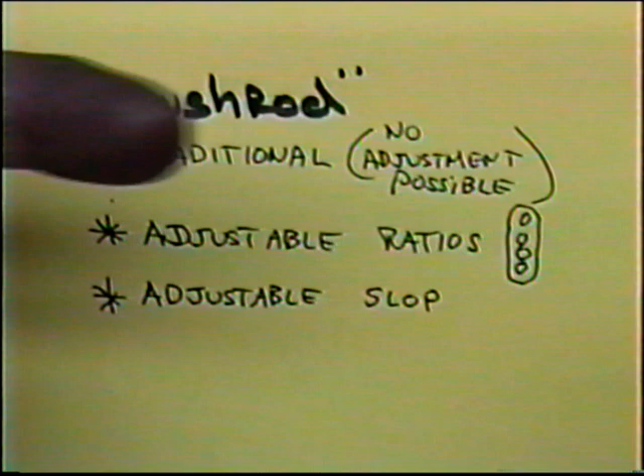It gives us that option. Now, adjustable slop would be that one of the holes between the pushrod that goes from the flap to the elevator would have an 1/8 inch hole and a 3/32 rod, and it would create some slop. Without that slop, I've found it very difficult to trim a plane to fly level. If a plane doesn't fly level, usually putting more slop in will help up to a point.

We've also included on some of our ships an adjustable length pushrod, and that's worked well. That's worked great for fine-tuning. But again, because we have a take-apart airplane, in a matter of 30 seconds, and we did it last year at the Nats, we can just take the pushrod out.

So what you see here is, on a traditional plane, where you have to cut the fuselage apart and drill holes, well, we've kind of left this in the past. We don't do this anymore.

We have 3 possibilities here that at some point in time we want to try different ratios, and we have that ability to do that. We just take the tail off the plane, drill another hole. We have adjustable slop, and the way we put the slop in the plane, I'm going to detail that out right now.

And we have an adjustable length on the pushrod. Now this is the little gizmo that Bill Biles sells, which is an excellent little thing. If you have one of those, that's a great way to do it, but there's even another way, is make an adjustable pushrod with a solder slip joint, and once you find where the plane flies in dead neutral, just make another pushrod without the joint.

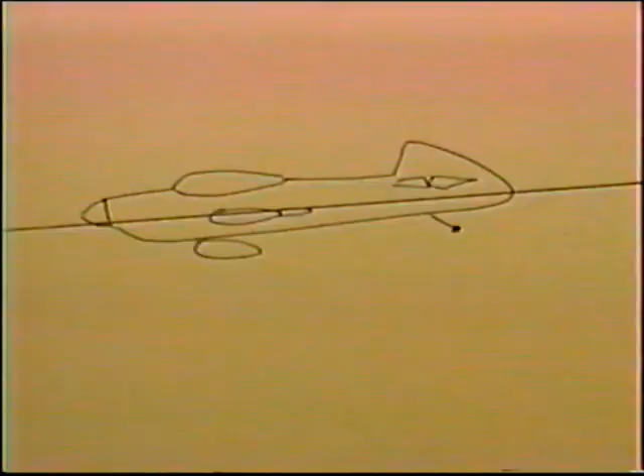Some thoughts that I've had, things that I've found over the years that seem to be very, very significant. Number one, if everything is lined up, if the wing, the motor, the wing, and the tail are all in absolutely perfect alignment, you probably don't need a lot of slop in a plane. Maybe you don't need any. I'm not sure. This is an aerodynamic thing that has many sides, and I can only give you my opinion. My opinion is that all planes should have some slop.

So what I have is on my flap horn, the hole that's going to go to the elevators, this hole is an 1/8 inch, and it has a 3/32 rod, and that just allows a little bit of slop. But now you have to line everything up in neutral. When my flaps are in neutral, I want to be sure the elevators are in neutral. Well, how do I do that if I have a slop?

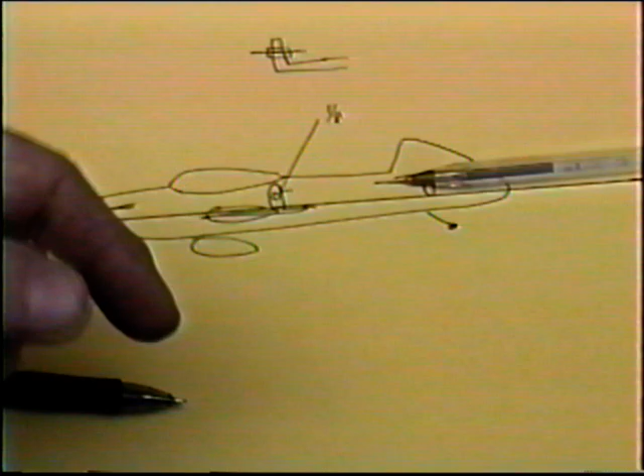Well, what I do is I take the pushrod end and put a little piece of fuel tank tubing over the end, and that lines up in my horn. Then I line everything up, and then I take that little piece of tubing off the pushrod and solder it. And this gives me just a little bit of slop, and I found that amount is a real good starting place. Now, some of the reasons that you might need this.

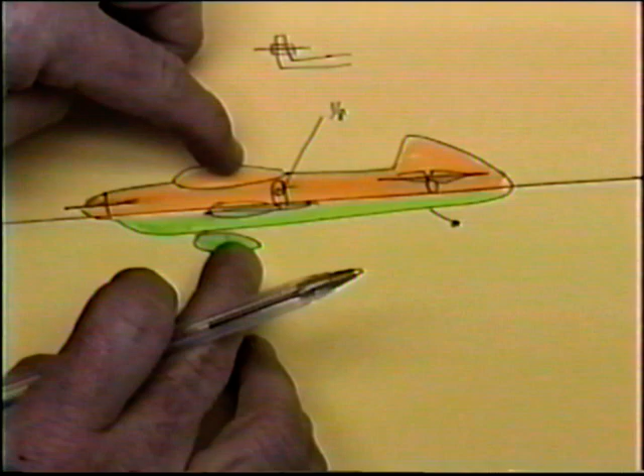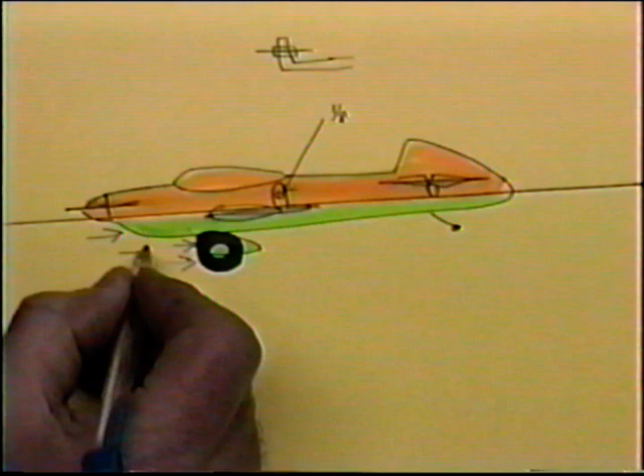Look at most planes, and you go to the center of the wing, you notice that the drag, parasitic drag, is not equal top and bottom. So let's pretend that you built this plane and you decided, well, gee whiz, for flying at my flying field, I need bigger wheels. Well, now you've made it even worse, because what happens? All of the parasitic drag is below that center line, and what it's trying to do, it's trying to constantly change the trim of the plane.

If you were to add something to the top of the plane, let's say you've redesigned a canopy for a larger canopy, now you've added more parasitic drag up here. And what happens is now the plane will not turn equally. A good example of that is most planes, when you put wheel pants on them and then take wheel pants off, you have to readjust the handle a little bit.

I found it's a very significant thing to get this drag lined up so that the plane tends to fly neutral. Now, if it doesn't fly neutral, if this parachute that this is running into, it's wanting to nose this plane down all the time it's flying.

The bigger you... pretend right here you had a little parachute. Well, that's what that little... you're trying to equalize the pressure on, and that's what a really good design, a design that evolves over many ships, and basically the Cardinal, Strega. You can figure out where and when this could be.

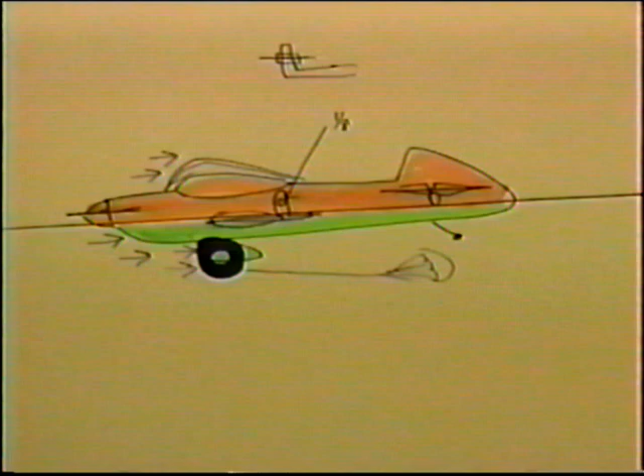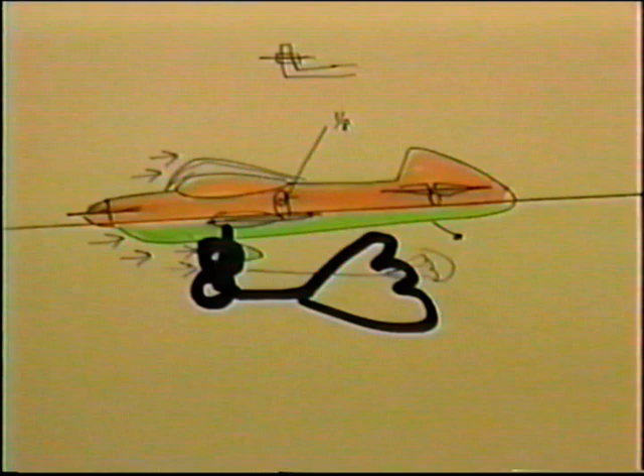Now, it changes in a lot of ways. If you, for instance, make the landing gear longer, that parachute just got twice as big. If you've decided, well, hey, my custom plane, I'm going to have this, the Willie the Whale canopy on it or something, you've just changed, and now you have to basically go back to where you've got to get it to self-center again.

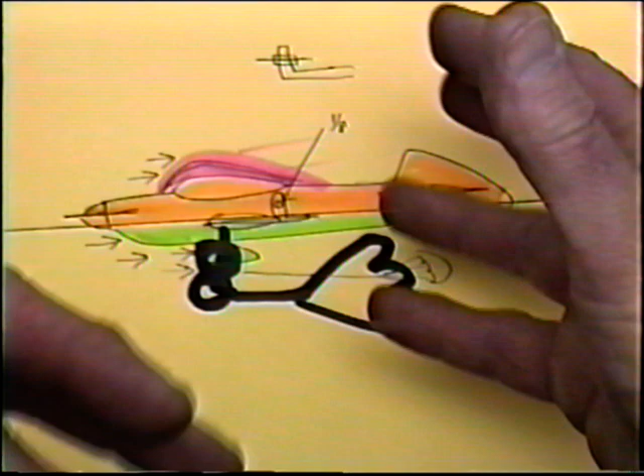Now, if this was all done ahead of time, and you were building an exact plane that had already been built many times, and you knew exactly which wheels went on it, well, it'll be fine. But we never do that. We're always building something new, and that's the fun of the hobby. So we want to be able to adjust this.

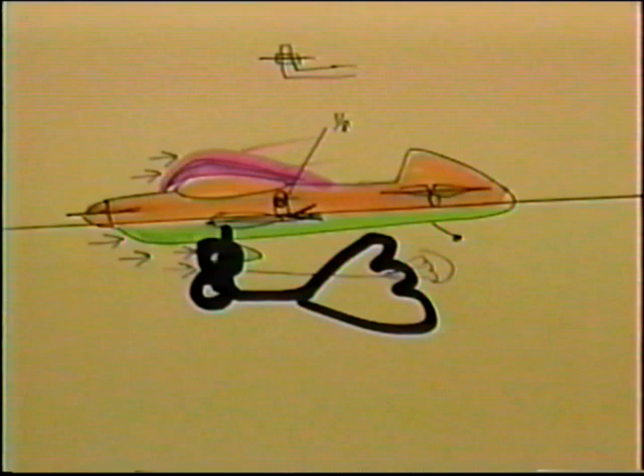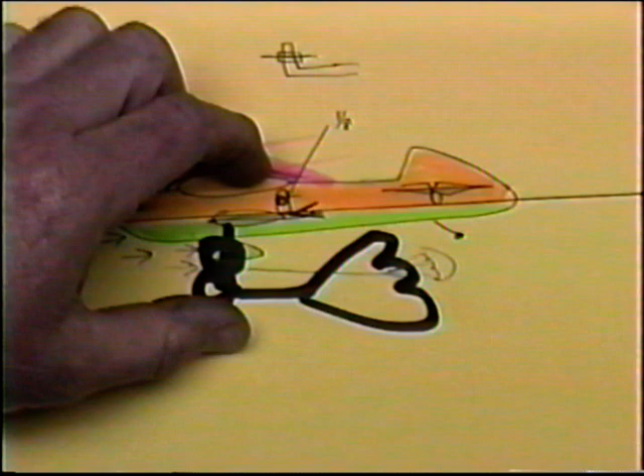One of the things that allows us to adjust is if we put a little bit of slop in the horn, it allows us to have the elevators in neutral and the flaps drop down just a little bit in level flight and in inverted flight equally. When it's done equally, our flaps will have a little bit of travel up and down, and the elevators will be in neutral. This compensates for the fact that things might not be exactly right on a brand new prototypical plane. Use a Nobler as an example.

What slop also does is, as you make the slop bigger—if you go bigger than 1/8, and I wouldn't think you'd have to—maybe something really needs to be cut and changed if you have to go more than 1/8.

It's pretty obvious to me what has to happen here. If this ratio, let's just make a number up, is 20 degrees, you've got 20 degrees of travel to do a corner. When you put slop in this, you're going to allow it to go maybe 25 degrees. You're increasing flap travel every time you increase slop. The exact opposite is also true.

You can compensate for that, and all these people on the market have horns shaped like bananas and every shape and size, and yeah, that stuff is all rocket science, but it doesn't take into account the slop factor. The slop factor, to me, is a significant thing, and having the horns at cocked angles isn't insignificant either.

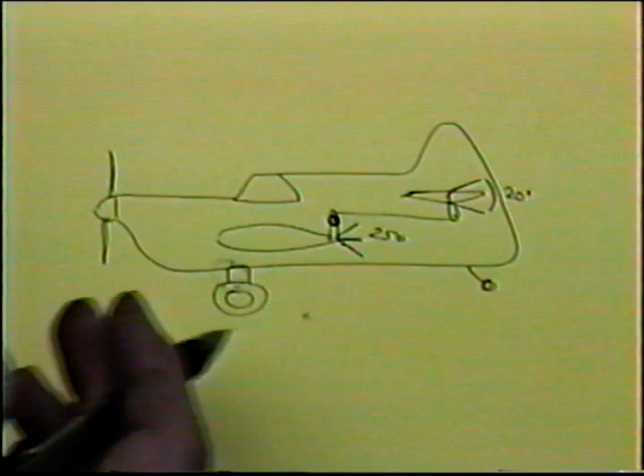It's like if you're going to run a race and you wax your shoelaces, yes, you'll run faster, but if you tie your shoes, you'll go even faster. This is tying your shoes. This is stuff that really does matter.

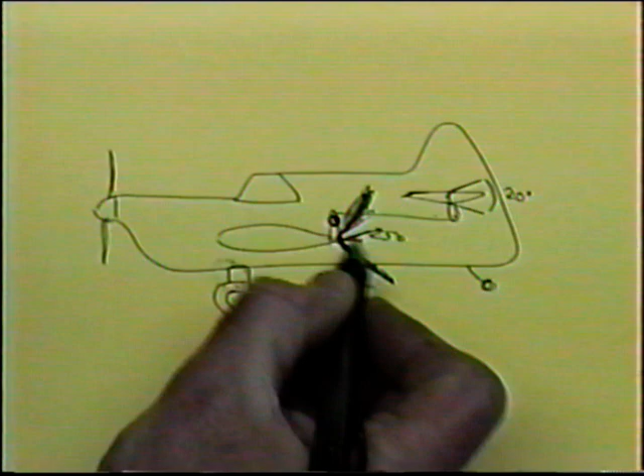Now, what happens is as a plane gets heavier and heavier—let's say, as an example, you have a 50-ounce Nobler—well, you want a lot of flap travel. Trust me, the heavier the plane is, the more you want flap travel. A real light plane, probably like a Billy Werwage plane, in fact I even think he wrote in his article to minimize the flap travel. And that's true, but most of us don't build super light. You build at realistic or heavy weights, and that's where it comes in handy to have slop.

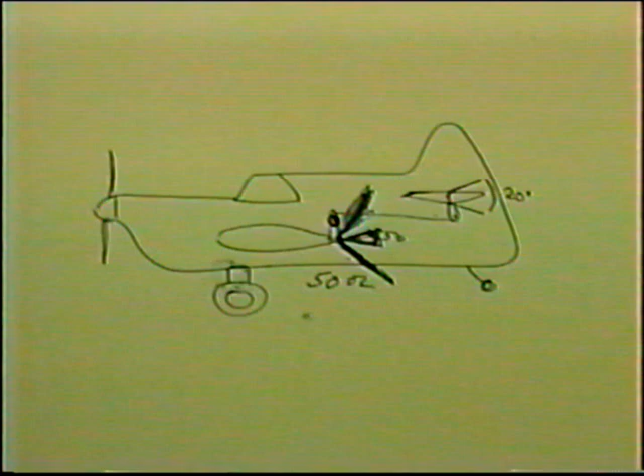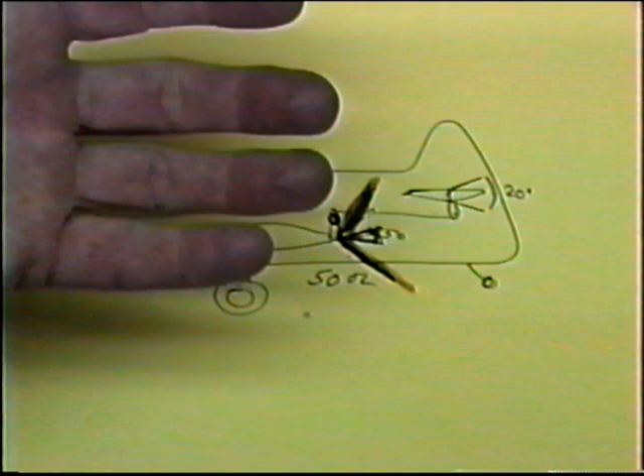Because the slop, if you start with a 1-to-1 ratio, is going to allow the travel of the flaps to be a few degrees more, and that usually generates more lift in the corner, especially if you're going to tape the hinge line shut. The end result is you have a very easy way to test this. You can put that little piece of fuel tubing back on this so that it is now symmetrical and there's no slop. Fly the plane, go in, take the bolt-on bottom hatch on our Typhoon off, put that back in, take it out, and see for yourself.

And that's always the best test of all—the best test of everything that I've ever done. I always tell people, it's nice to call up this person, that person, call up Windy, call up whoever, dig up Abraham Lincoln, whatever you have to. But the bottom line is the best test of all is try it yourself. See how you like it.

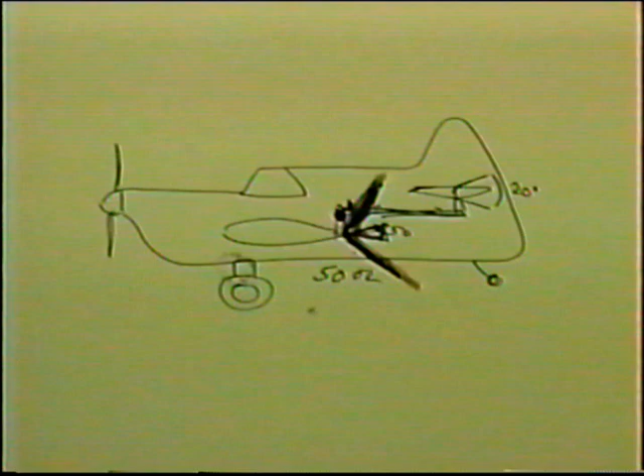Also, when a plane doesn't turn equally, let's make a whole new storyboard. I was going to try to do it with this one, but this is such a significant thing. Paul Walker wrote about this in his Impact article. If your plane tends to make nice, tight little squares, but on outsides it's really mushy, well, you want to adjust the pushrod length.

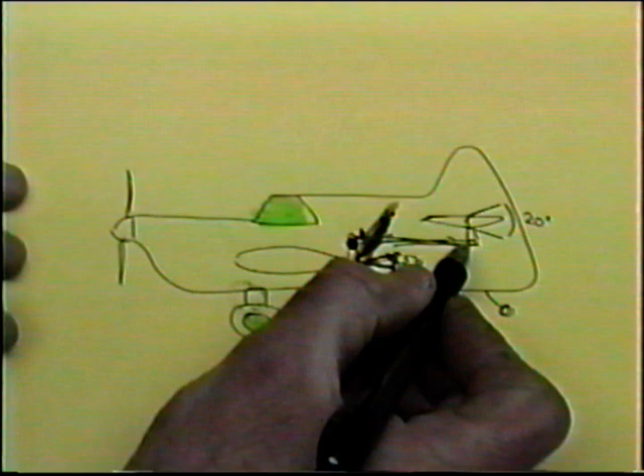And a lot of times you can do this a very easy way. You can just make another end for the pushrod. You can cut the pushrod end off where that little piece is. You can also buy that little Bill Biles adjustable thing, which is a handy on-the-field adjuster—that's a good way to do it. But my first choice is just to have a whole new pushrod made.

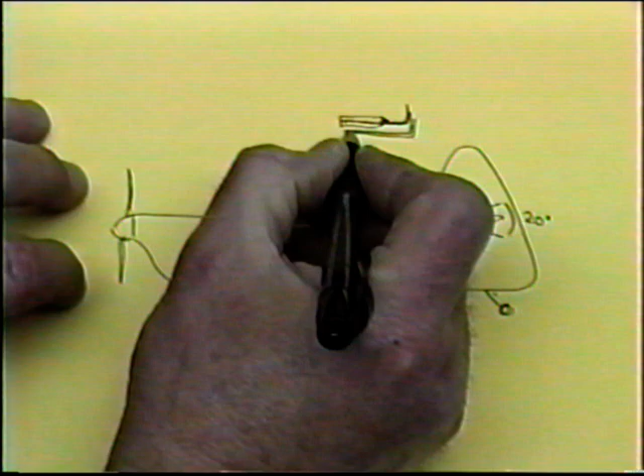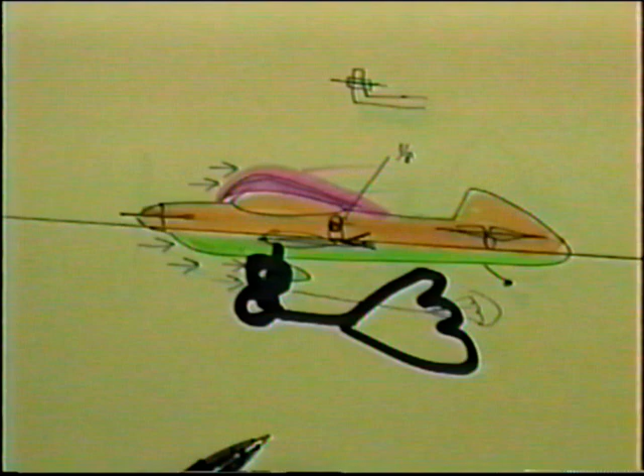Paul Walker wrote about this on his little trim thing, and it's an excellent thing to refer to. But this is all part of having all these adjustments. If the plane is a one-piece plane, some of these you have to make hatches for and other things. But here's the bottom line.

A take-apart plane, it's like having your cake, like having your push rod and eating it too. You have all these possibilities because you can get in at it, make a new push rod longer and shorter, adjust it, adjust the slop. You can do all these things, and that's why I say over and over again, it's a pain in the neck to make a take-apart plane. It takes a lot of extra labor, but somewhere down the road it pays dividends. Right now, as we go, and we'll probably make the push rod today, the dividends start to pay back. And that, to me, is what's worth it.

One of the other things that's worth it about a take-apart plane - these are things I've kept in the shop for a long time. This is a spare push rod. You can see how we put a little detent in here on the end that we're going to solder, leaving enough wire sticking up here. We'll do one of these real quickly on video.

Having this joint here allows me, first off, to put the plane together and get some idea of what the overall length should be. Now, the end that's going into the front hole, I need to put a little piece of fuel tank tubing on here so it'll center back to zero.

Now all I need to do is - this is going to give me my slop. It's this little piece here that's going to give me the slop. Just with a parting wheel, cut off a piece, an eighth of an inch or so. The only reason I'm going to use this little piece is to line up the flaps and elevators. Once I think they're lined up, I take this out and this self-centers my push rod so that the slop is the same amount up and down. It's just a spare piece of common fuel tank tubing.

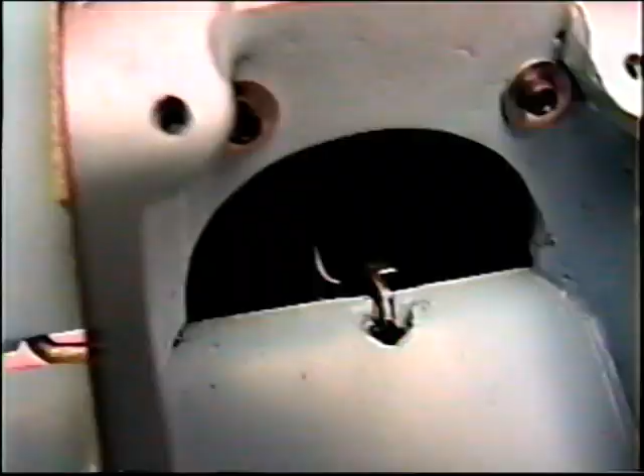Okay, now that's hooked in. The push rod's installed up in the front. We need to just bolt the tail in place temporarily. I use the same little aluminum washers from Micro Fasteners - the address is on the previous video.

Now I need to look in and see how much longer or shorter it needs to be - just making sure this hasn't changed. Let's quit fooling around. We can look right in there and see how much we're off by. This is our go, no-go gauge. I'm going to guess it's about half an inch. So I need to make my test push rod half an inch longer, and then I can make my gauges to line up the elevators.

I have that - I can reference off the rivet lines. And when I take out my little piece of brass, everything should line up perfectly. Famous last words - you ever done one? You know that never happens. Okay, now I can just take an eyeball guess of how long that piece has to be. I don't even have to solder it, I could CA it. See what I'm doing? I'm making myself a pushrod length gauge.

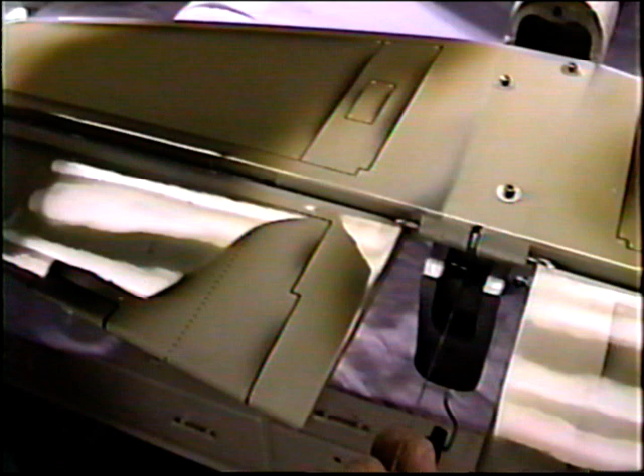Put out this way, roughly. Actually, if you didn't want to make a test pushrod, you could just use a piece of 3/32 wire.

First step is to make 2 pushrod ends with a precision drill. Since we use an 093 wire, I want to use an 093 drill. I want a tight fit, but not so tight that I crack this part when I put it in.

Now, a couple of things. When you're bending a pushrod wire, you don't want to get a perfectly kinked bend, a 90 degree angle. You don't want to put it in a vise, is what I'm saying. You want to have a little bit of a radius out there.

Now the same thing, I'm going to make up the 2 little pieces of wire, the extended ends. I always bend them this way and then trim them off rather than trying to bend it so small, because we only want just a little bit to stick up out of the pushrod. This is the primary end, the end that's going to wind up going in the front of the plane.

What I want here is, since there's going to be double wheel collars holding this on, I want this little knurled part so the little set screws can drop in there, giving me a redundant double system. And I want the hole in the pushrod here so this will slide through, and then I'll trim it off.

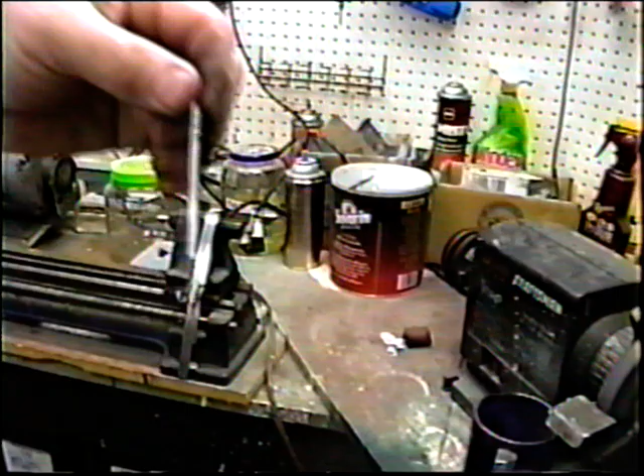Even a little detail like this, I think, just makes the plane look finished. It makes it look like we care about even the smallest detail.

Again, I'm looking for these things I'm careful of, that I don't have this rod running into this in the end, because we have that half a fillet in there. I don't want any - actually if I use this hole, I'll have to bend the rod a little kink in it, I don't want to do that right now. But that's about how I've set it up to begin with, and of course that's always adjustable as need be in flight.

I want to do some dry fitting up on this engine combination. First off, before I do anything, I need to switch to the prop thrust washer if it fits, the one with the pins in it that Bob Zambelli made up. This may have to use the puller to get it off.

Well, I'll spend the rest of the day doing up some dry fitting here. I want to look at how I'm going to have to take the muffler and tank, all of these components, apart when I go to do maintenance on this. And I want to see what the spinner - well, the first thing is I want to put that on. I ought to do it in order.

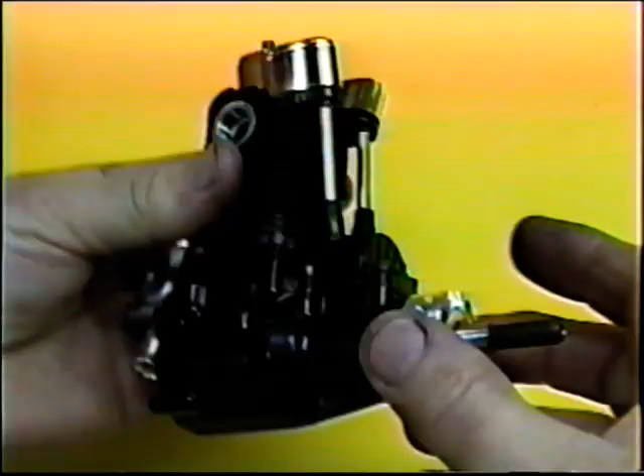This is the motor. This is one of the few modifications we're making to it. One modification is to loosen the two carburetor screws and move this over so it sits almost in the center of the model now, just to make the linkage to the carburetor a little bit easier.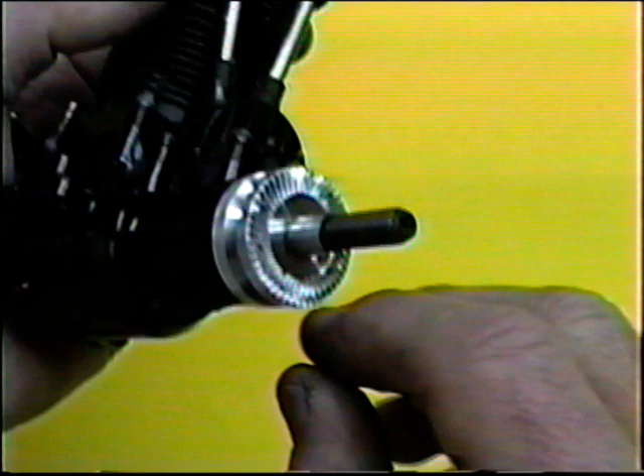The motor's already broken in, and I need to remove this with a puller. I have one that Bob Zambelli made up - he turned the diameter down to fit inside our spinner back plate, and also, with a precision jig, made two pins so that we can possibly eliminate the ability of the motor, if it backfires, to loosen the prop.

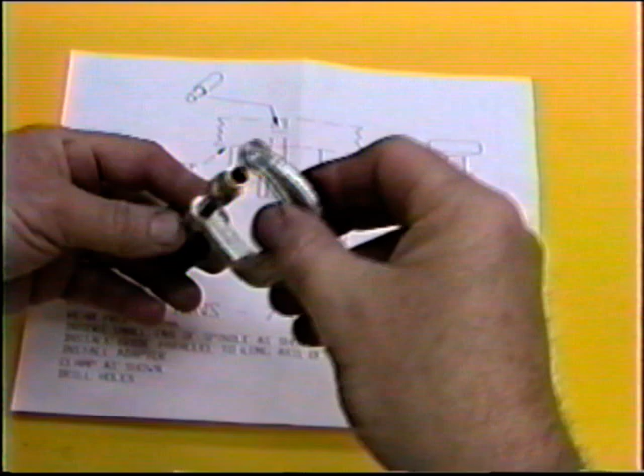Like everything Bob does, it's really world class. Nice little accessory item - the jig block, the adapters, and some aluminum washers with knurls, real knurls.

Once you have this, you need to be able to drill a spinner back plate and everything to a precision fit. You just can't put 1/8-inch holes on this, it'll be sloppy. You want a nice tight fit once that's put on a motor. To show you what a precision fit this is when you get this on - wow, that really socked up nice.

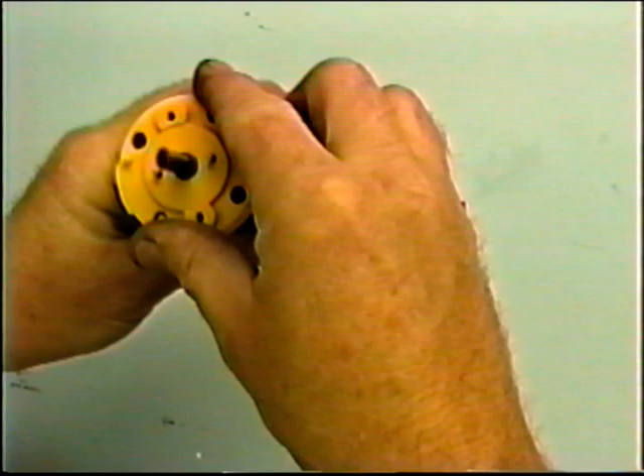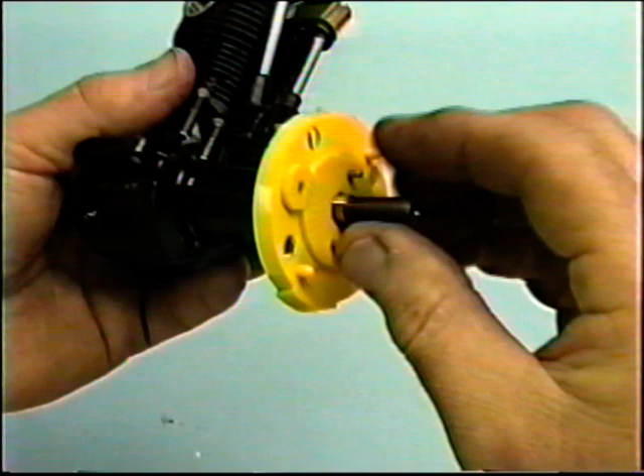And now I just need to do the prop. That much should at least help lock it in place.

All the props we use, once we have the back plate, and we're going to buy a couple of spares, we'll have the tool that Bob came up with - it worked real well. We half relieved the prop, and we need to key it in exactly so it doesn't hit on the detents. It's such a tight fit, in fact I may have to go one drill size over because it's tight on the pins. One drill size oversize, and that keys right in there. Now we have a whole keyed unit.

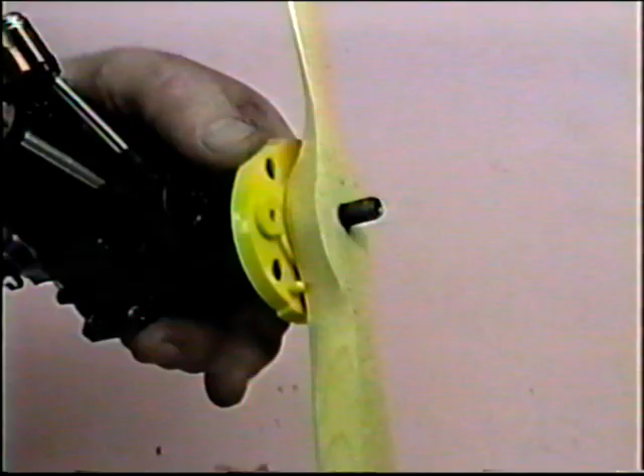As long as I'm setting up Bob's little jig to do these props, I may as well get a couple of spares made. These are the 14.5 rev-ups - we'll balance them, of course. Once they have this little modification in the back, they'll be ready to use on the Typhoon. And if we break all 5 of them on the first day, shame on me. Once we decide to start experimenting with props, each one is going to need that little detent - I think that's a good safety feature.

When doing all this bench running on 80s and 70s and 90s and 65s and all of these engines we've been playing with, one of the things we found is that the Saitos especially are not real critical to exhaust tuning. They're probably made for mid-range, cam timed or whatever.

They seem very uncritical to the exhaust system, which is a real plus in this case, because what I did - I wanted to just snap the whole Typhoon together, basically because I just want to look at it like a voyeur tonight. I haven't really ever seen it all in one piece yet, so I wanted to put the muffler on and put all the hardware on the spinner and balance up a couple of 14.5 rev-ups.

I thought, well, this weekend I may shoot some pictures of it, so I'd like to. Of course, it's going to have retracts right now because it has no landing gear. If we hand launch it and land on the scoop, that'll be fine.

I just, in case we do get time to take some pictures - again, I like everything polished and neat and clean. I want to show you how quickly you can buff up a Saito muffler, because it's really good aluminum. Look how quick that buffs up.

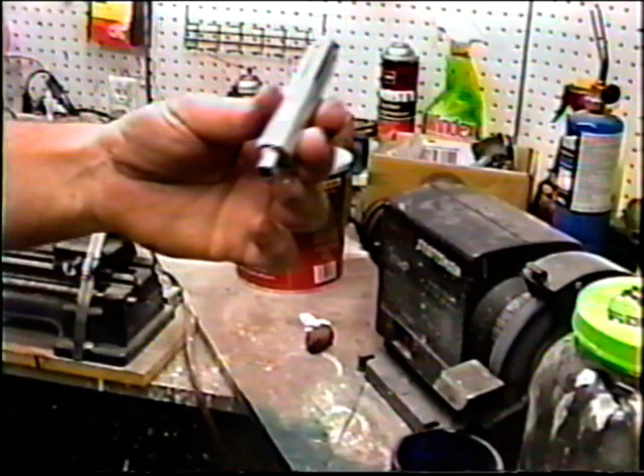Only going to take about 5 minutes to do the whole thing.

Choices we have is to try some different exhaust systems. We have a 90, 91, 72.

One of the unique things is I have to be able to keep the oil away from the area where the Z-tron is, so that's one of the things I got to be careful of - I got to kind of take that into account. And it's nice that these engines are not real vertical - otherwise we'd really be in a little bit of a bind.

Just look how nice this polishes up. So that is - it adds a nice touch.

Now, as planned, within our major plan, we could use the wider muffler. We really have just enough clearance, though, really not a lot, so I would have to get ahead of it with a little less bend.

This is a 90 that I have on here. That's the one Warren Walker made up. But this is the first time we've had it all together, so we're being a little bit of a critique about it.

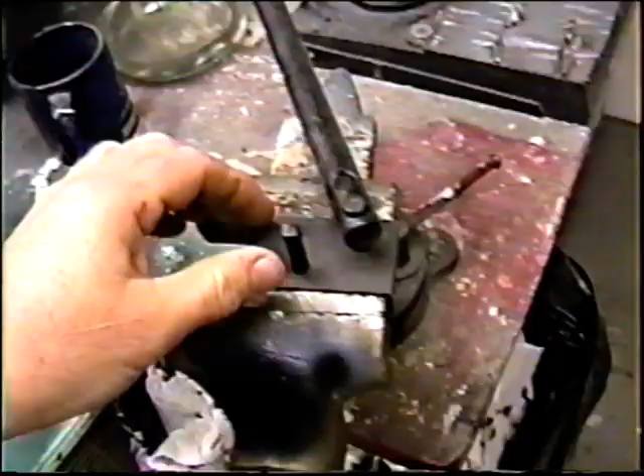So, a well-used wire bending jig. We have three of these. We got these from John Brodak, and they work to perfection because they put just enough bend in a wire that you never kink or fracture the wire because of the radius on the pin. Again, available from John Brodak.

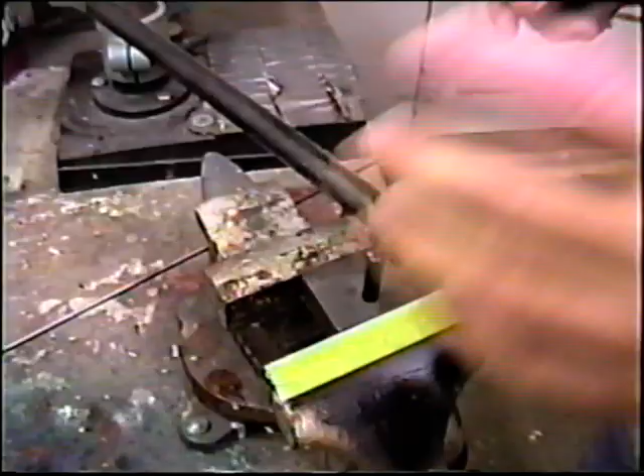This is the heavy-duty one because we bend horns with this. Jimmy uses it when he runs production runs of 1,000 horns. This works perfect with wire. A couple of things: you don't want to bend it any further than you have to and then bend it back. You'd like to bend it right up to the point, especially on control horns, things like that.

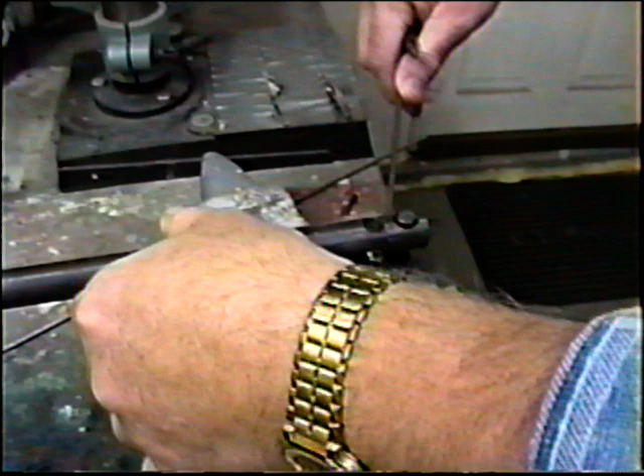But anyway, the leg that's going down into the wing, we don't care about the length. We'll trim that off to our gauge. But I always put a piece of tape on here because this acts as my go-no-go gauge, and wire always springs back. So if you were to just measure 90 degrees and bend it, it's going to spring back. You've got to, according to each piece of wire, kind of... it's hard to explain until you've been disappointed a few times.

Now I'm going to estimate what I think is going to be my spring back here. And what I do, you can make all kinds of dead stops. And this can move, that gives me a little bit of... Now I take this out. That looks like it's not 90 degrees.

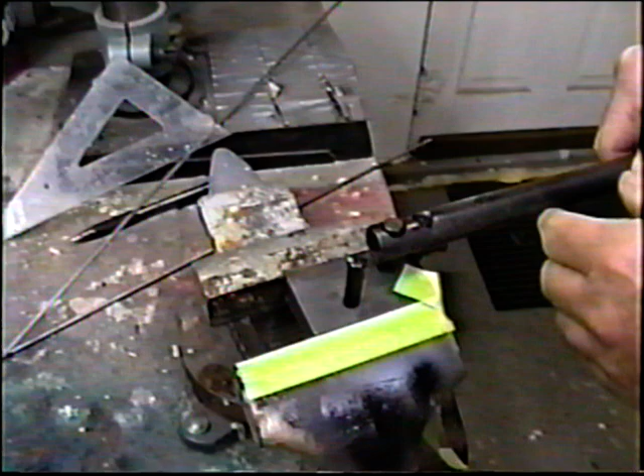Let me get a triangle. Which is probably going to tell me I've got to move that tape just a little bit. Yeah, see, I'm less than 90 now. So what that's going to mean is when I come around, okay, I want that tape to move just a bit.

Let me get it off. Listen, now this won't really be super accurate. I've got to do this every time I work on something, and I'll move it to there. Let's see, and if that works.

I think it's safe to say one of the jobs most people really don't enjoy.

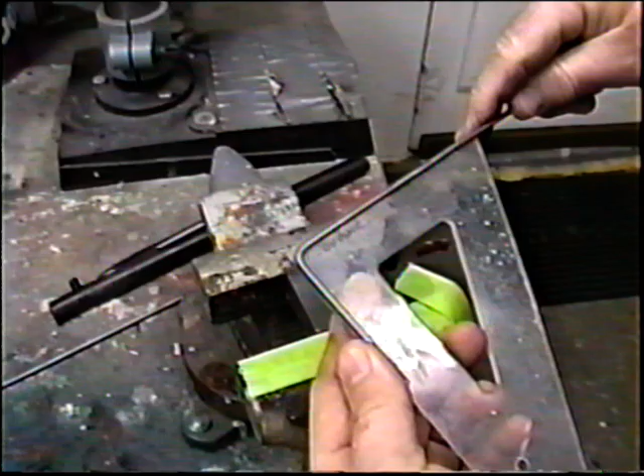Now see, I'm still not quite 90, so what it means, I can move the tape even more. But eventually I'm going to hit this, and then I'll bend a fresh piece of wire. This is just a sacrificial piece of wire. And see, if I have, once I establish a 90-degree bend, the rest is relatively easy. Now let's just see if we can get it.

Now that's too much, I can see that already. So we need to go back. Now when we're doing production things, we make a little dead stop and hot stuff it right in place. But first we have to set up where this particular batch of wire is going to bend at 90 degrees.

Now the one thing I'd never want to do on a part we're going to use is bend it back. Well, this piece now is toast. You start with the other end of the wire. Once you get a 90-degree bend, you are pretty much on the way to success, and the rest of the landing gear bends are kind of easy to predict.

Eventually, if you go back and forth, that looks pretty good. What I have is a piece that I know fits into the wing. I'm looking down at it because I have to allow for the wire being pulled into the jig, and this will just be a test. So let me adjust it longer. You know, you're always going to have to bend a few pieces of wire.

Affecting prop clearance is one consideration, and one of them, of course, is the wheels. We save all our wheels for just such a day so we can decide which set we're going to ultimately wind up using. I got the two wires bent now.

It's the angle forward that's going to determine the ultimate prop height, and I want that angle forward for a very specific reason. I want it so that when I put the nose of the plane down and let go of the tail, it rests back. If it stays in that position, the gear are too far back.

If it just drops like an anchor, well, you can figure it out. We're looking for a point where we just let go of the tail and it drops down very casually.

We'll start by eyeballing down here and see that this wire is further forward, so I need to take that one and bend it further forward again. Then we'll flip it up on a table and check for clearance on the wires, and see that they're both relatively parallel. In fact, the back one's got to get bent just a little bit more forward.

And then I'm ready to do my test. And boy, this works on any plane. Gets it almost perfect on the first shot before you ever even fly the plane. I found this to be the absolute key to getting it set up right, and this is for tar.

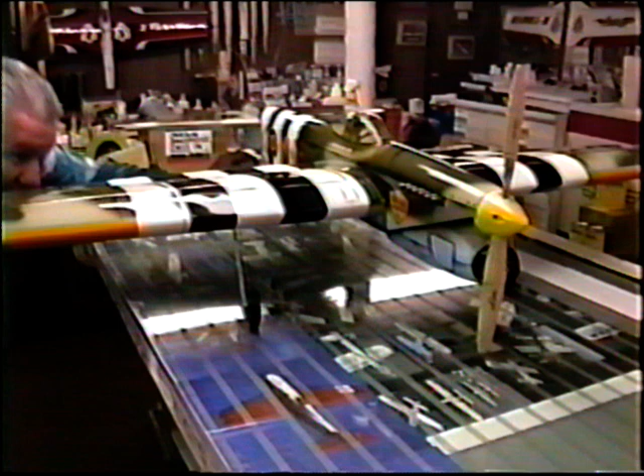For grass, I like the gear a little bit, maybe a lot further forward, depending how rough the grass is. This is a 14-inch prop. That looks like we would have enough, except we're not in a level takeoff mode, since we're going to want to run a takeoff, and that only gives us a half inch. Well, not crazy about that.

What I ought to do, because this is a critical adjustment, is bring it a little bit down. Okay, I'll make the next set of wires. I'll keep these as a spare set, and make the next set 1/4 inch more.

But this is the test, and this is the critical, tricky part. The plane is on its nose. You let it go and the tail comes down slow.

Now see, that's too far back. If that didn't come down, it means we're close. See how close we are? We need to go just a bit further forward.

But the other thing it's telling us is we want to for sure make the wires 1/4 inch longer, because that'll allow us to bring them further forward. So now we know the two critical things: make the same set of wires up 1/4 inch longer, and maybe 1/4 inch further forward, and then we'll keep this as a spare set.

So we have all these dimensions written down, and we have our test gauges, making up the next set of wires, and we can do fine-tuning on them relatively easily. And I want to show how I adjust the leg length.

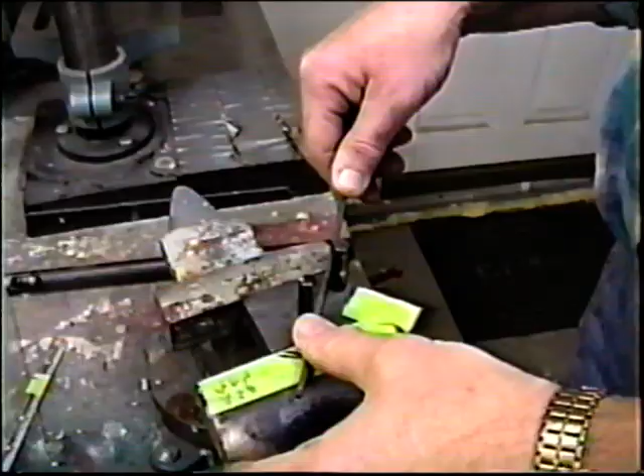To replicate a set of wires, I have all my dimensions, and this is why I always bend an extra set, because while I have this all written down and fresh in my mind, it's easy to make another set. It only takes a few minutes more.

But if I have to reset this all up later on, because I want to make grass gear or a longer set, a shorter set, it's a nightmare. Just having this ability to do this accurately and relatively quickly, we know that goes to that mark, and we can make a set of wires up.

Okay, now I know I have this. I want to go to 4.5. You notice that I'm using, let me do it so you can see it without that piece in here. This is my leg length now that I'm adjusting, and this is a real good way to do it. I butt this up here, and I find the center of the wire at 4.5. I've got it written down because I'll forget. At my age, you forget everything.

This was 4.5. Now I want to make it, let's add a quarter, let's add 3/10. Let's make it 4.8. And that should give us enough clearance, and that we can move it a little bit further forward. 4.8.

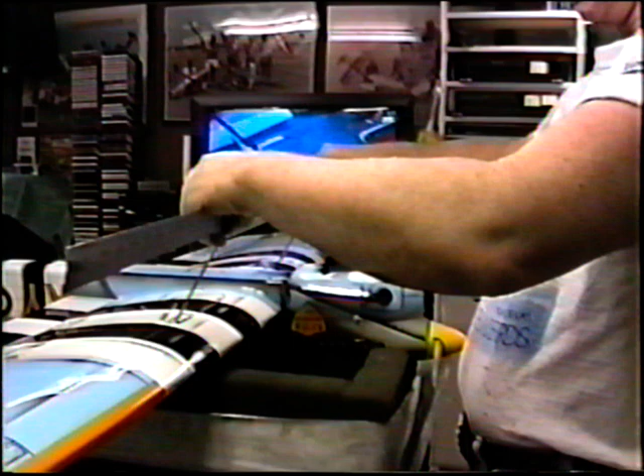One of the things I've done in the past to do little tweaks - again, anytime you make an adjustment, is it correct in this dimension? If not, you need to do a little wire tweaking. It looks like we're close. Just one more little tweak. Sometimes this tweaking can go on forever.

Once you have it right, I'm trying to anticipate a little bit of an angle because of the lead outs. We're at midpoint right now, and we'll just hope that if there are any inaccuracies in this, we'll make up for them with the slop in the wheels. That's the same as the slop in the controls.

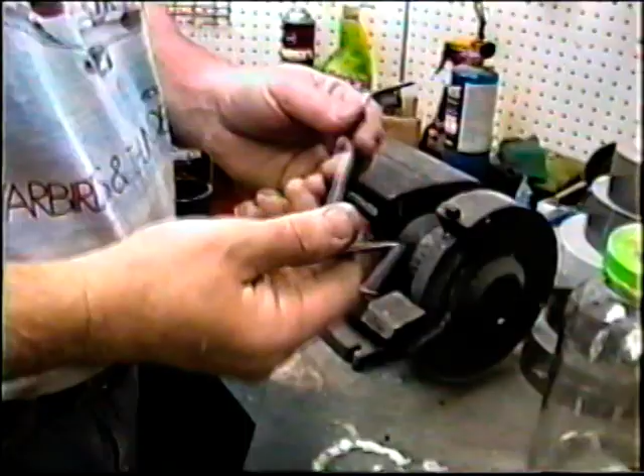If you have tight wheel bushings and they're out just a little bit, either toeing out, you just put some slop in the wheels and the plane will land like it's on rails. The wires, at least for this point in time, are bent for a good medium point for the first flight.

What I want to do is remove some of the material - I don't touch anything on the torsion arm, but this piece here I can relieve some material. We don't need an eighth of an inch of wire right here. And I want to roughen up the part that's going to go against the door legs, make it as rough as possible so I get a good glue grip.

It's really a pain to me because we do a lot of landing on grass. When these start to split and then they break, it's a weak link in the plane. Anyway, you can always remove some material, nothing near the bend and nothing near the end - almost the same as a control horn leg.

Anytime you can get a gram here, a gram there. I don't want to make these weak, I just want to make them rough - the more little flat spots I can put on it, the better, especially down at the end where they're always prone to crack.

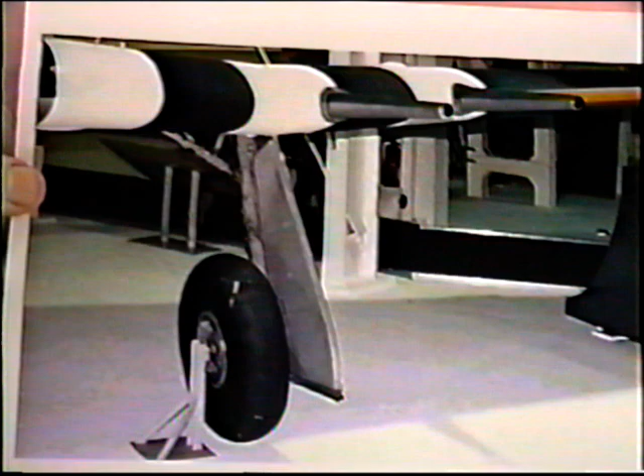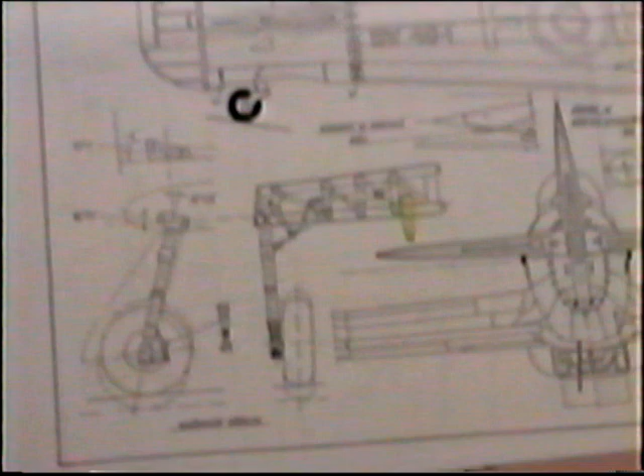The door shell is very similar to a Spitfire, where it has this little lip and edge, and we'll try to replicate that. This view here gives us a good look at what that should look like from a detail point of view - this will be real handy. It also shows us the scissor link, which we want to replicate if possible.

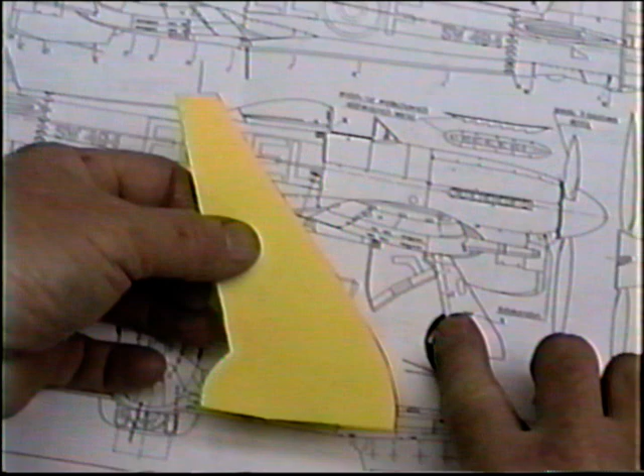So let me get out my artist sketch pad and try to work out that shape, and do the fudge thing to get it in the right proportion to the plane. I made a lot of little patterns until I was kind of happy with the shape. I like the way the wheel exposes at the back and the strut doesn't come down the middle, so I tried to get the aspect ratio right.

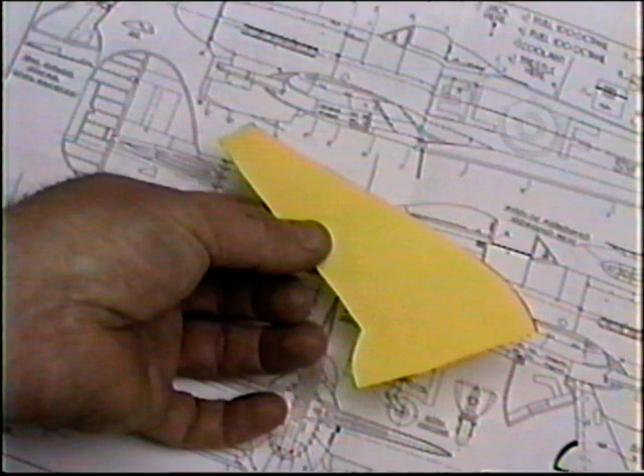Then I went over to the plane, which is sitting on the floor over there, lined it up and saw if it looked right. It looked about right, so I had it taped in position. Now what I want to do is cut a couple of these out of 64th plywood.

Now the trick with the 64th plywood is I want the grain - there'll be two laminates, one going this way and one that way, so the part is in essence six layers of plywood with different grain directions. I don't want them all going with the grain in one direction, because then they turn into thin little oil-canny things.

Next piece, I have the grain going in this direction. Now I want to take the same piece and glue it to the plywood with the grain going in this direction. If you try to make two pieces the same and then glue them, it gets difficult. This is an easy way to get two pieces of plywood to laminate, and then I'll trim it back to the shape of the first part.

I want to get a good laminate here, because this is one of the parts of the plane that takes a really tremendous beating. And boy, when they don't hold up in service, you're always fixing them and then they get oil soaked - what a nuisance.

The grain is oriented in two different directions here, so this should work well. Of course, then I just want to dress the last little bit off. So this will now be a 32nd of an inch thick, and I've got the multiple grain, so it's relatively rigid. Now the next step is I laid out where the wire is actually going to go.

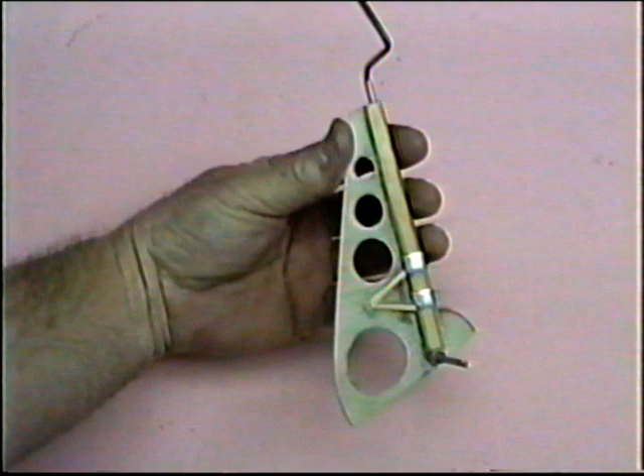What I did is make up a paper pattern so I could transpose it. Otherwise, how do you get it right? See what happens when you try? It's a problem. So this way I can transpose some of these so they're symmetrical.

Now once I glue this on, I'm going to leave that little edge, which adds a touch of being prototypical - maybe a 32nd of an inch around the whole perimeter when I trim this off.

Block sanding in that last little bit.

Now just after a final sanding, these will be ready for a coat of Rodak primer, and then we'll let them dry overnight. I just want to dress the corners off - I don't want to have razor edges on this.

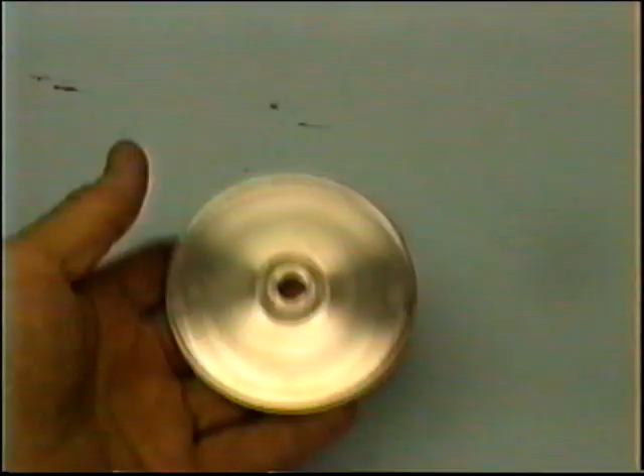And I have what's left of this piece of glass. I'm looking for a clean corner. I can work off of this corner here. I need to clean this up first.

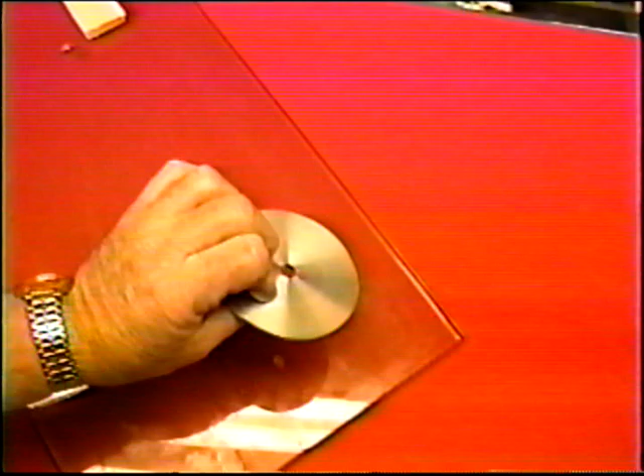I want to try a little bit of an experiment because Al is, of course, going to want this part back. Now, if I glue it to the table, which I normally do, then I'm pretty much sacrificing this part. It would have to be put back in a lathe and trued up, cleaned up. I'm going to try mounting it with rubber cement because all we need to do is seal that back edge. This is kind of an experiment. If it doesn't work, we'll have to go ahead and sacrifice Al's back plate.

One thing I've noticed, it's always easier to spend other people's money than to spend your own. So let me give this a try. This is a good time to try it.

This will be to try to get some of the rough spots off, because what we want to wind up with is the top side of this to be a perfectly flat surface. I'll take a rag with some acetone, try to clean the rest of that off. Actually, this is going to be big enough.

The base plate, in this case, I'd like it to be as clean as possible. And glass is always a good base plate, assuming you have it, because it's expensive. You just don't want to take it and throw it away. We try to use it over and over again.

Maybe that's what, if this rubber cement doesn't work, I was thinking a second choice would be contact cement, because then I can take it apart with heat. By heating it, I can take it apart. But we'll try the rubber cement first, just as an experiment.

And even at this, I put some M600 on here too, just so we would get a reasonably good result, as we've used this glass about 40 times already.

Again, since we've never done this before, sounds like something from my teenage years. Did you ever do this before?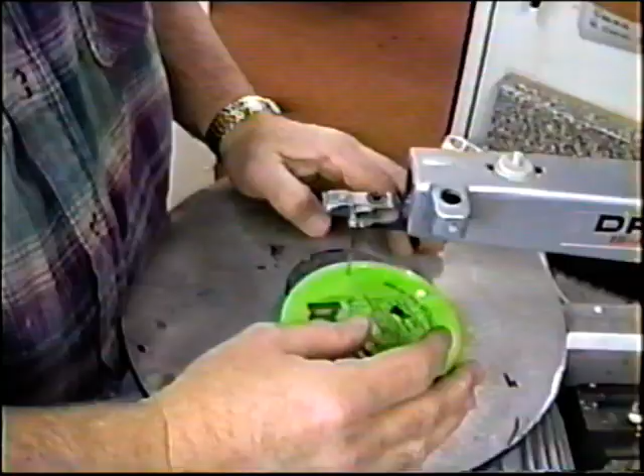Okay, now I have to build a dam around this. I'll do that with balsa wood. Worth trying. I have a jar top that I can cut the whole middle out of to make my dam and save a little bit, well, it'll just make for a nicer mold too if it works.

Again, this is the kind of stuff, if you experiment and it doesn't work, the world didn't end, you just go make it the traditional way. We're trying to learn something.

Yeah, we're going to find out if this is a practical way to do this.

Hey, what do you think, Columbus went to a travel agent or something? Yeah, put me up on the Santa Maria.

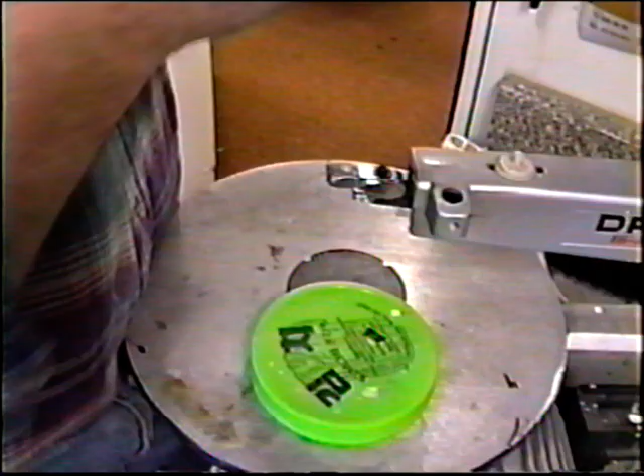You think I was going to edit that off the tape? I'll just add this to Al's bill. Anyway, it's not funny.

Well, it could scare you to death when these saws come apart.

But the point is, if you can make these spinners and make them light, it opens up the door to a lot of exciting projects. That Martin Baker project might be one of them, where the thing that keeps it from being practical is you can't buy a spinner in a store that doesn't weigh 10 ounces.

All I need this part for is to make a dam.

Other ways of doing it would be to just go buy some modeling clay. We're trying to use inexpensive materials here, and that's what makes the projects possible. If you're going to get this stuff made at Boeing, it's going to be a fortune. A part like this would be $1,000 if you had somebody do it in industry, but you can probably do it yourself.

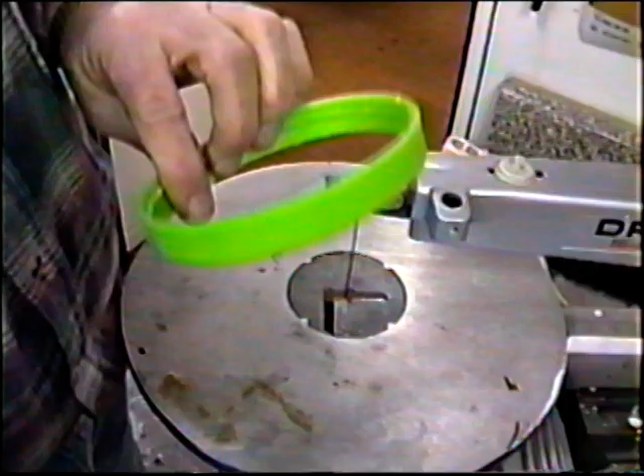Don't try this at home products, like this jar lid. Actually this would work here, and I just thought it would be a piece of PVC pipe.

And I got to tell you, a true story. I know Al probably won't mind me sharing this, and let's face it, he has no choice, so I'm going to tell it anyway. He sent me a set of plans to one of his planes, and it was rolled up in a piece of PVC pipe. I couldn't believe it, I said whoa. It was like $70 to mail it or something, I don't know. But when I got the PVC pipe, I thought, what the hell is in here? It caught me off guard.

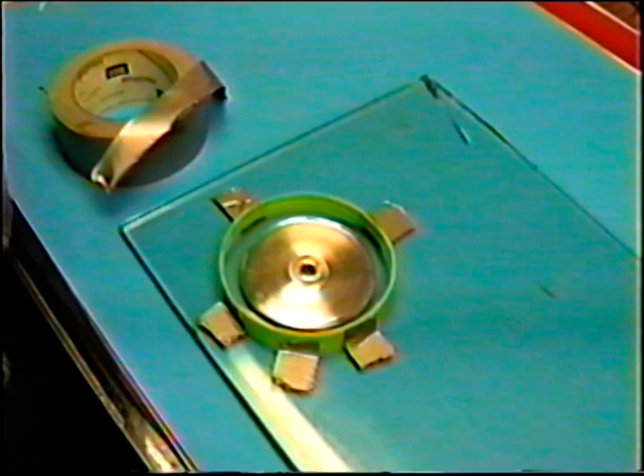Anyway, I'm going to build my little dam up here with just ordinary pieces of duct tape, because all I needed to do is not leak the rubber out. I'll do the rest of this off camera, just with little pieces, then connect them and put a piece around the whole perimeter. You put the duct tape on, it doesn't have to be fancy, just as long as it doesn't leak.

Find a place where this is relatively level, and I'll check it with a level, but then I'll need to be able to shim it. So it's on a part of my table that I know is relatively level. Otherwise this is going to all pour out one side. I'd like to have this surface relatively flat, just as a reference point.

Now I need to mix up the molding rubber. This is the material of choice. It's about $90 for a container like this, and we'll get many molds out of it. But it's not out of the range of the average hobbyist. It's certainly not in Boeing territory.

Right on the can lid, it tells you stir well before using, and they mean it. This is a 10-to-1 mix by weight, and you've got to be accurate. You just can't be sloppy and go 'about.' You've got to do it with a gram scale if you want this to come out to its best properties.

And it's a little on the sloppy side to work with, so we usually wind up trying to be careful anyway, not to contaminate the whole place. Now I need to get a stick. You can see how, if you didn't stir it, the marbleized parts of it that aren't totally homogenized. We allow about 10 minutes for this homogenizing operation. And even if you put this material away for a couple of days, you need to rehomogenize it.

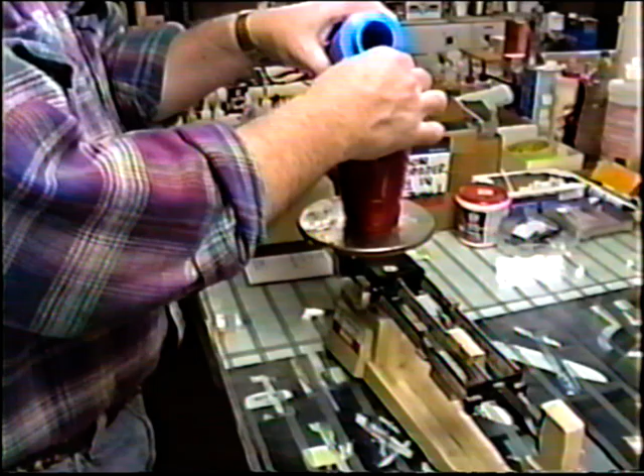What I've found a good way to do this is to pour the catalyst in the cup, so if you go over by a gram or two, you can just add the equivalent amount of the molding rubber. But once you figure out all the little bugs of doing this, making those little plugs, we're going to use prop resin. We're going to use EPON 862 when we make this part. It'll be a post-cured part. It will not be made out of the stuff they make boats out of, or cosmetic parts. It'll be a structural epoxy.

Here it comes, here it comes. Well, okay.

Now the trick is, very, very slowly and for about 5 to 7 minutes, stir this. Biggest mistake you can make here is to whip it, put it in a blender. It takes about 5 minutes. You've got to stir it slow so you don't get any bubbles. Even stirring it this slow, you get bubbles, but you want to minimize the bubbles. You can see it's starting to get into suspension already, but we'll do the rest of this. You'll be bored watching me do this for 6-7 minutes, and then this will be ready for our pour.

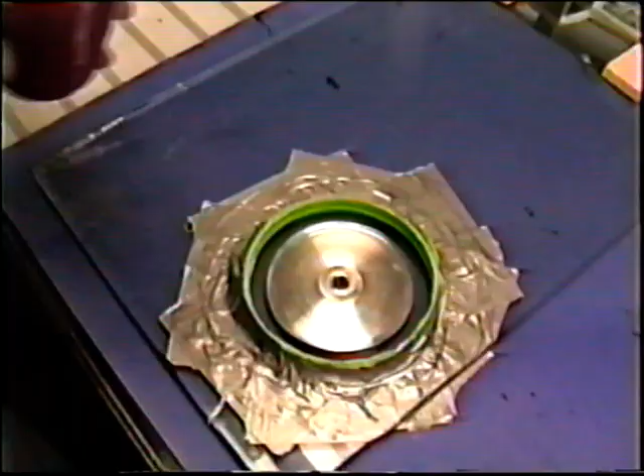So now we're ready to start this pour. Starting a pour, what I want to do is get a very small amount down in all the little cavities. You don't just pour it in like you're going to pour a milkshake, I guess. I want to try to work this into all the little cavities.

Again, a nice part about molding with rubber, there's not one part of this that an average person can't do. There's really nothing high-tech about this. Making propellers, making tuned pipes, making hard molds, yeah, that gets intensive. But molding rubber is like a great entryway.

And the parts you get, like the Typhoon cowlings, they're just cardinal cowlings. Those parts are just as good as if you had made them from hard molds in every way, except that it doesn't cost a whole lot for the tooling. It doesn't cost thousands for the tooling.

The reason I'm doing this is I want to get all the air bubbles to bleed up. A good way to do that is with a little bit of heat. The heat will usually make the bubbles all rise up off the part. What we'll do is pour a little bit more, do the same thing, a little bit more. See the bubbles already coming up? We're trying to just let the air bubbles evacuate.

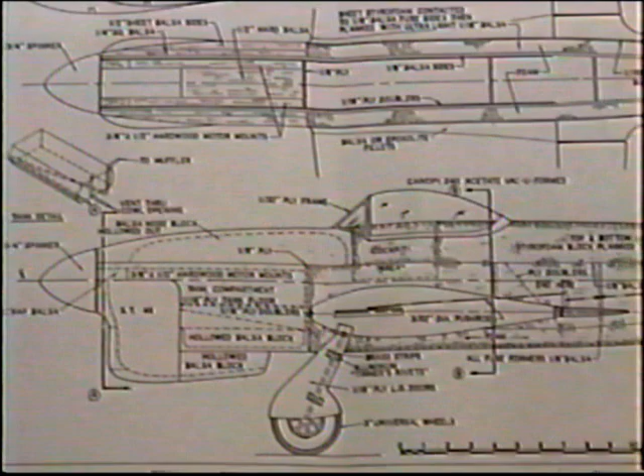He did a nice cockpit rendition with the British yoke. This was published in 1976, and if anybody's looking to get a Xerox copy of it, just contact Tom McLean - I'm sure he'd run you off a copy. But I'm assuming you might still be able to get the plans from Flying Models. 1976, by Steve Ashby. Looks like a really nicely drawn set of plans.

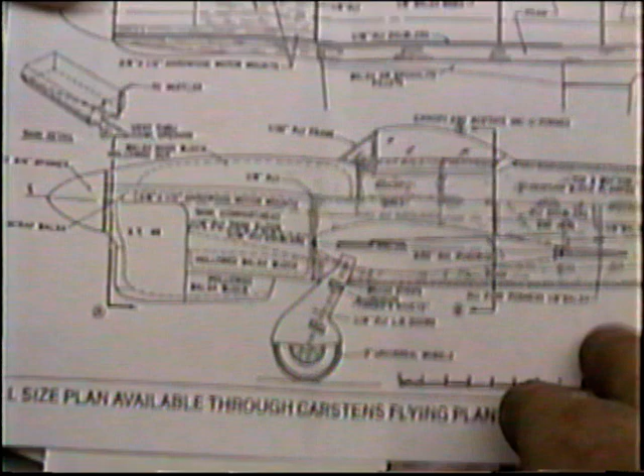As I said before, we are coming up - look at the way he did the landing gear here. He's done it just a little bit differently than we have. With the 2-cycle engines, the nose always just gets way out of proportion - even mine is too long. I don't know if we've got that any better, but I want to see how it looks when it's actually flying. It'll be very interesting.

We certainly got the prop clearance part right. We have the angle just about perfect because we can't really do the final thing till we have the fuel tank installed. Until we mold up some nice four-bladed props, this will just live with our 14.5 rev up right now, but getting a good clearance on a 14.5 is not an easy task.

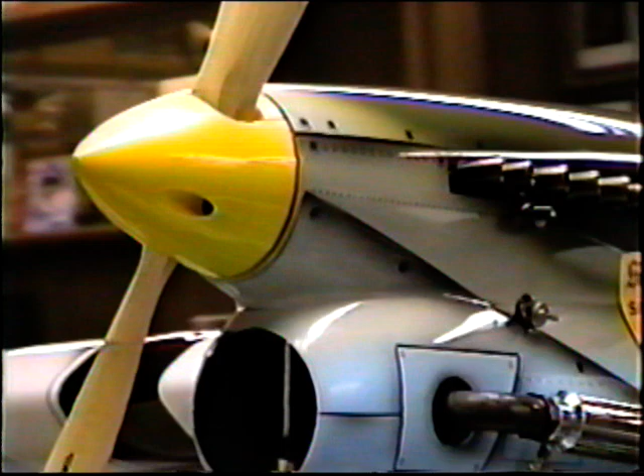I like the way, these are just some of my thoughts, I like the way the navigation lights looked, they do have a little bit of a prototypical look. I love the way the sub-rudder looks. Just some of the features I wasn't sure whether I was going to really like or not. The nose art, where the needle valve is, is particularly nice because you don't get your hand anywhere near the prop. Of course we'll never be starting it by hand anyway, but not having to flip a prop and not having to put your hand by a needle valve certainly doesn't make your life any worse.

I think we got the gear track and the spacing just about right here, another significant thing. And if we decide to fly the team trials with this plane, of course we'll take the cockpit out, possibly take all the electronics out because we won't be able to use them. That'll save a couple ounces.

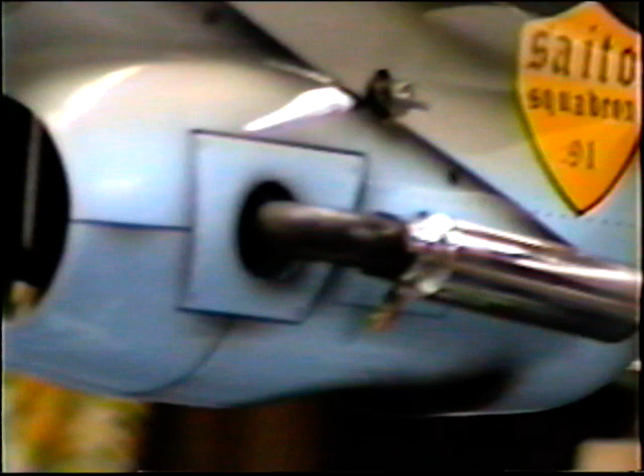And we have the Zambelli exhaust system out being welded right now, a custom little muffler.

I really do enjoy after a very long winter, coming up on the point where we actually can start enjoying the little enjoyable things about the model now. One of them is sitting here having a cup of coffee every morning before we start our mold production. Just sitting here enjoying a couple of different views, as I'm sure all modelers do. Even Peeps, I think, enjoys it.

I think it's a fitting and a very nice tribute to Harold Price. And I hope it really, the people that have followed along with all the videos, that you've gotten some fun information and added to your modeling enjoyment. And if you have, then this project is a success for all of us.

And like I said before, after a long winter, summer is coming. And we have production work to do today, so let's quit fooling around.

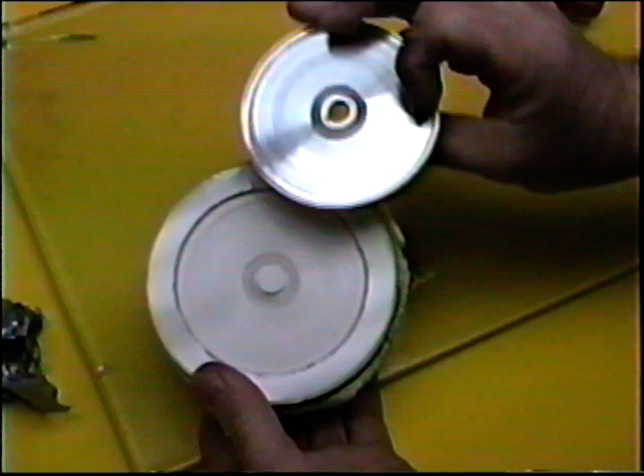In fact, we're getting so close to the end of this tape, I'm not going to lay this up until we start another tape, because I hate to be in the middle of things. People always give me a, 'You're right in the middle of doing something.' Yeah, you know what, guys? Try shooting these tapes, it ain't easy. There's days it ain't easy being windy, and today's one of them.

Now notice I left this green lid in as a little reinforcement, so it gives it a little support. Now if we were going to make this a permanent mold and make hundreds of these parts, what I'd do is put this in something and put some fiberglass cloth around it, so it would have like a cradle, a separate piece to hold it in confinement.

But since once this piece comes out, what's going to have to happen? Well, I'll let Al do it, and he can make this as thin as he wants. He just puts this in a lathe and runs a tool across it, gets it a little bit thinner or dressed off, because it'll have a Teflon edge when we're done laying it up. We'll do that on the next tape. We're going to start another tape probably later on today. I'd say that's going to work.